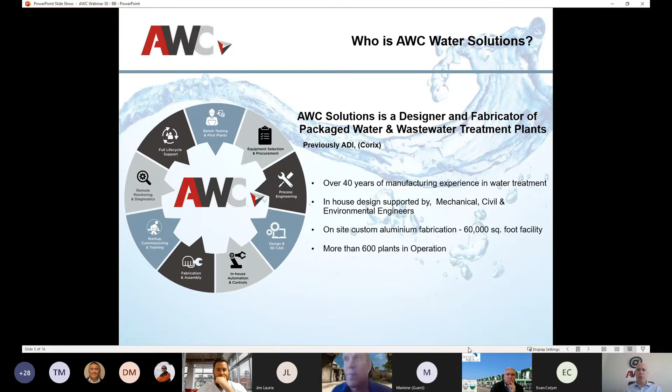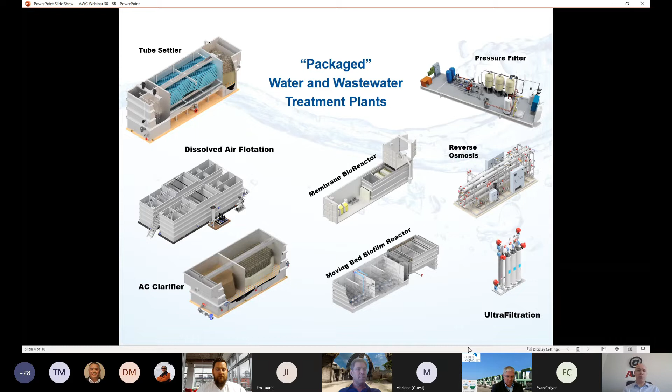Now, what makes it very unique with adsorption media is because it is adsorption, it can't fit into a gravity clarifier like we do with some of our DAFs or other medias. It does need to be pressurized. So you would typically be seeing these as a post-polishing stage. So in some of these projects we're looking at, we'd start with a clarifier, like a tube settler, and then from there pick it up with adsorption.

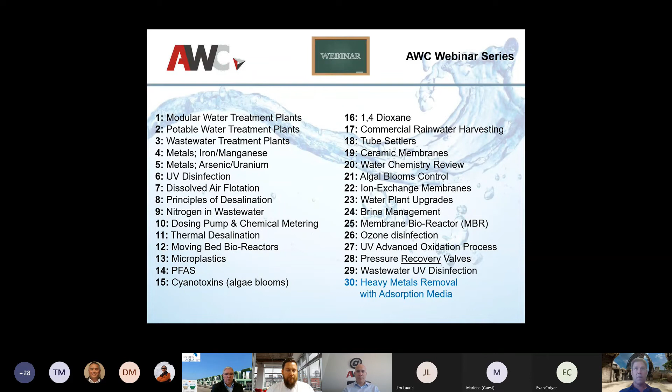So with that, I'm going to bring it over to you. Bennett, take it away. Thanks, Alex. Are you going to be running the slides? Nope. Go ahead and share your screen. Okay. I can share my screen. Oh, okay. Does that work? Everybody can see that? Yeah, we can see it. All right.

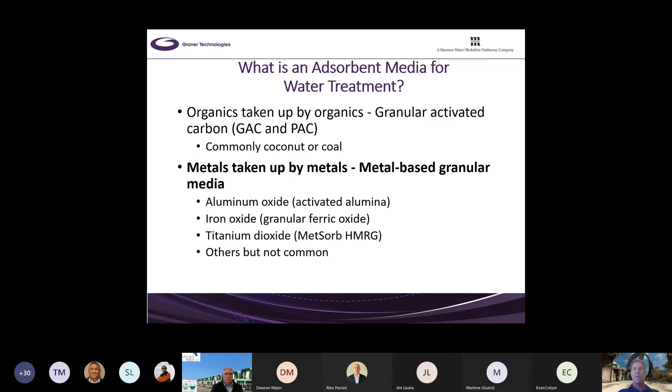Now, when you need to take up metals out of water, that's when you're going to use metal-based granular media. The most common one out there is aluminum oxide, because it's so inexpensive, but it has its downsides. Iron oxide, very prevalent. Titanium dioxide, that is our Metsorb, that's Graver's product. There are others out there, and some on this call will say, oh yeah, I've heard of X, Y, and Z. But these three are the most dominant players in taking up metals by adsorption.

So what are the advantages of adsorbents for metal removal? Well, probably the most prevalent one is it's extremely simple to operate. I mean, all you need are a couple vessels, put media in, you may or may not even backwash depending upon the operation, and you just start going.

You can remove multiple metals at the same time, and what's different is you don't get the rollover like ion exchangers or GAC with the preference. There aren't preferences going on. So when you take up a metal, arsenic and uranium, you take them up and they are attached to the media and they will not come off, no matter how much other metals come along. So when a media truly is exhausted, it's exhausted.

Another great advantage that we see when it comes to impacted waters from seawater is TDS. Chlorides, carbonates, sulfates do not impact the performance of what we're trying to do, which is the take up of metals. Now, it doesn't mean other things won't impact us, and I'll go through that real quick. But as a rule, TDS in its basic form does not impact us.

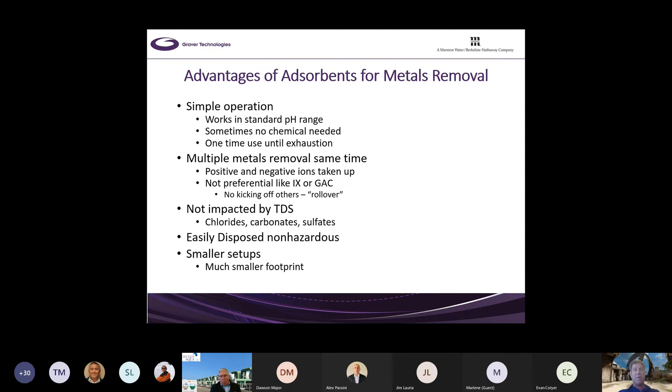Another huge component of adsorbent medias is they are disposed of as a general rule as non-hazardous, depending upon which one you use. For our media, it's always been non-hazardous. Other media sometimes can or cannot be non-haz. And it goes back to simple operation. You can do smaller setups. When you have the right water quality, you can get much smaller footprints in your treatment systems, which is a big advantage for your customers.

So where do we commonly use it? The most common way, and we're talking the majority of the way the product is used, is you're taking the parts per billion range of whatever metal contaminant you have, and you're taking it down to a lower parts per billion range. Generally, at the beginning, you're always going to be non-detect for the ones you're really going after. An example is 100 parts per billion, which you might see from a mining operation or something like that, and you have to go to drinking water standards. This would be a perfect opportunity.

Another one, the most common that you see in drinking water, is 15 parts per billion down below 10. That's a good example. Another one is uranium. And again, this would be another one where you take it up non-detect until you eventually get breakthrough, exhaust the media, and then you replace it. So you use it in tailings, dewatering construction, and potable systems.

In dewatering construction, you see a lot of applications where multiple metals need to be taken out at the same time, because regulations just seem to be getting tighter and tighter. I have one project in Wisconsin where, during the process, the regulators took the arsenic level down. So they have to look at additional treatment.

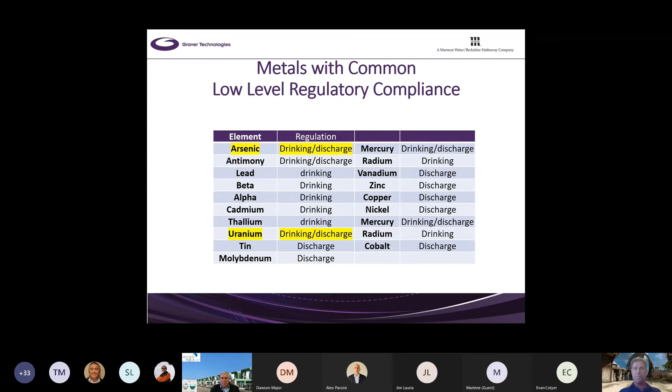But this is everything that, as a rule, adsorption media should be able to take up all at the same time. Very important. So going to, wow, this is great stuff. Well, what do we need to consider?

Well, unless you have a very unique situation, parts per million levels of anything is just going to be too high. Generally, it's going to be too difficult, too expensive, unless, again, you have extreme circumstances that just require you to use adsorption for any number of reasons. Zero liquid discharge, for example. That would be a good example.

And there are interferences that people in dewatering and potable just don't care about. Phosphorus, that'll impact the life of the media. Silica will impact the life of the media, as well as iron and manganese, but you can take those out generally with a coagulation filtration process or oxidation filtration. So those generally aren't an issue.

And the other thing to consider: do you really need to backwash or don't you need to backwash? That goes back to zero liquid discharge, low liquid use, low liquid waste. What are the priorities for the customer?

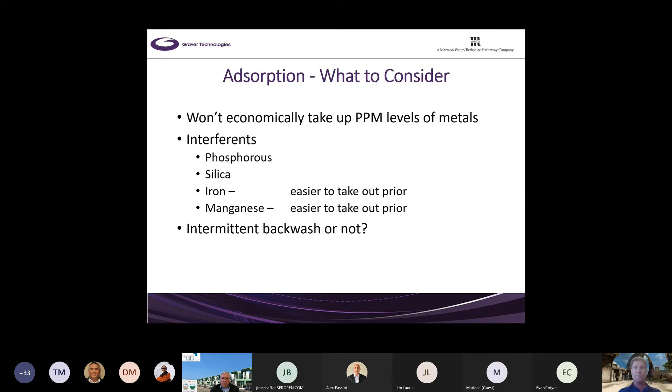And final slide here, everybody. Can you believe that? This is a pretty quick presentation.